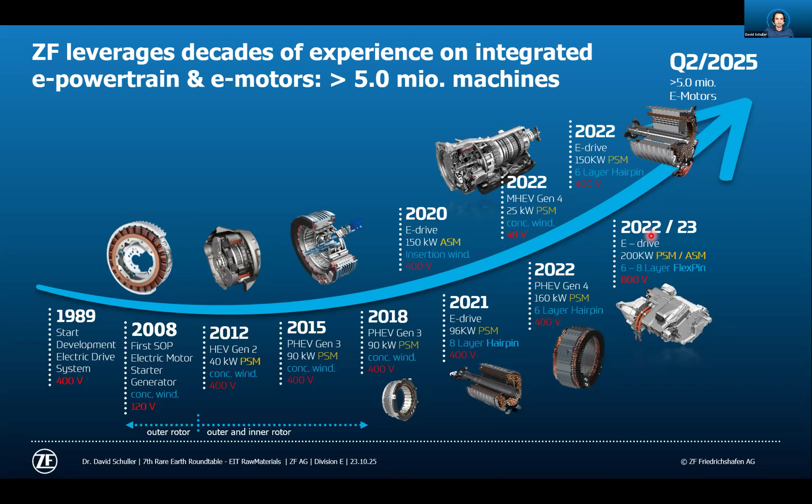Something I want to add is ZF, Zahnradfabrik, was in the past a company really famous for gearboxes, for mechanical components, and that changed the last decades. So we are currently more like a technology company that offers software, power electronics, sensors, autonomous driving, shuttles, braking systems, steering systems. So it's really a system supplier.

Focusing only on eDrives, you can here see some examples. So we have, like already mentioned, ASM machines, PSM, also SESM, where we use copper windings instead of magnets inside of the rotor.

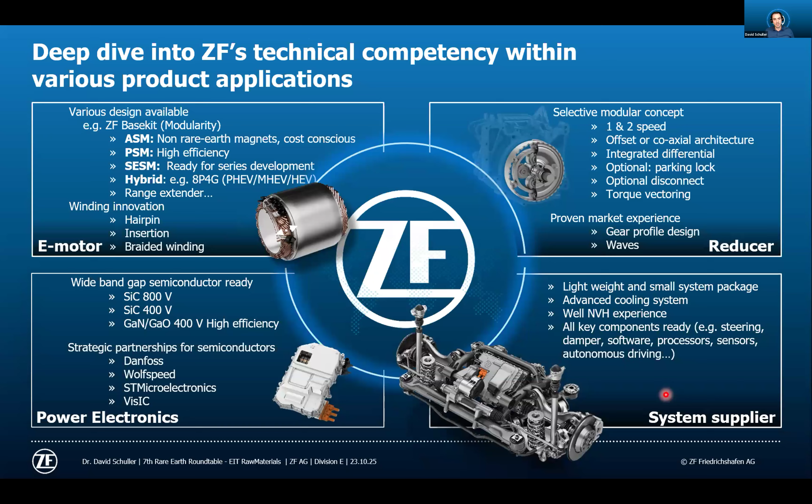We have a variety of different hybrid systems, range extenders, and own patents and developments in the field of hairpin innovations to produce more compact designs, developing our own power electronics with collaboration partners, using our old expertise in the field of mechanical components. We are currently one of a handful of system suppliers that can offer you a full spectrum of eDrive software, power electronics, suspension, steering system, braking system. So you need only the battery and then you can drive.

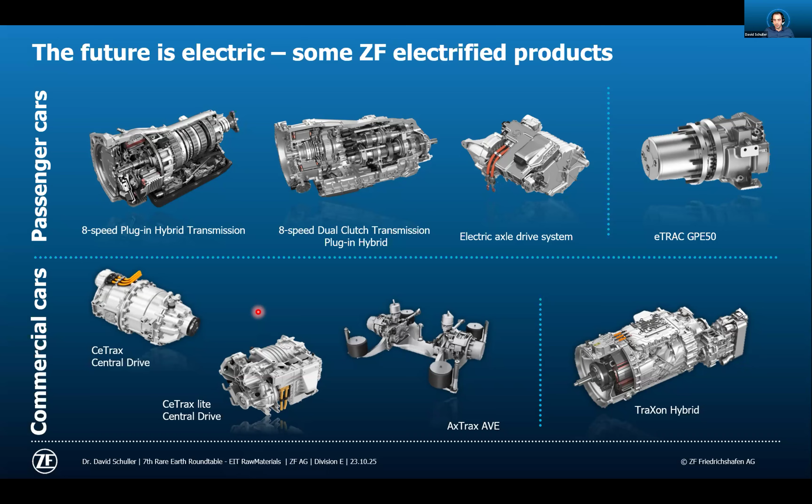All the examples were more related to passenger cars, so here you see some pictures, some illustrations of typical products. But we have also a lot of activities in the field of commercial vehicles. Because of an acquisition in 2020, ZF is currently the largest supplier of commercial vehicle applications. So we have eDrives for bus applications, trucks, and so on. We are currently in a situation where we can electrify more or less everything.

If we see the development targets of the last years, there was really a new challenge to be faster, because we have more competition in the field of eDrives, the development times have to be reduced, also because of the Chinese speed. One topic was really to be more cost effective, to show higher agility, to be faster in the development.

Here, for example, we offer, since a few years now, a base kit application. It's a modular system, an eDrive toolbox, where we often have the same components and only change, for example, the active length. With such a base kit, we are really fast in the market, faster also in our development times, because it's already ready and can only be tailored.

The second point, like always, we have to be more efficient also in our eDrive designs. We have to be innovative with new technologies like better cooling or high voltage applications. That was one really strong pillar, and was something that was really fantastic also for me, because it's more like a passion, that sustainability was important.

So the last two years, I would say, there were new questions related to the point: where do you buy your rare earths, on which mining operation, what is the separation process? And so we had really the challenge to go more inside of the production of the magnets, not only buy magnets, but try to understand the full supply chain behind our magnet suppliers.

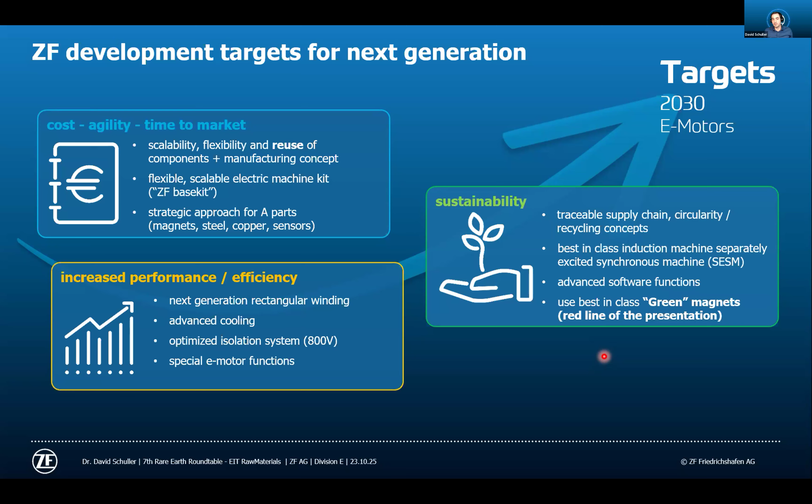If we speak about CO2 footprint, one easy way is to take your eDrive and list the materials, the raw materials, and collect a rough idea of how large the CO2 footprint of a magnet is compared with other material classes. That is shown here. So copper, for example, in a standard eDrive will have an impact of about 7%. Then you have e-steel produced by blast furnaces, the most common way, which also has a lot of waste because of the punching process, and has a really high impact on the CO2 footprint.

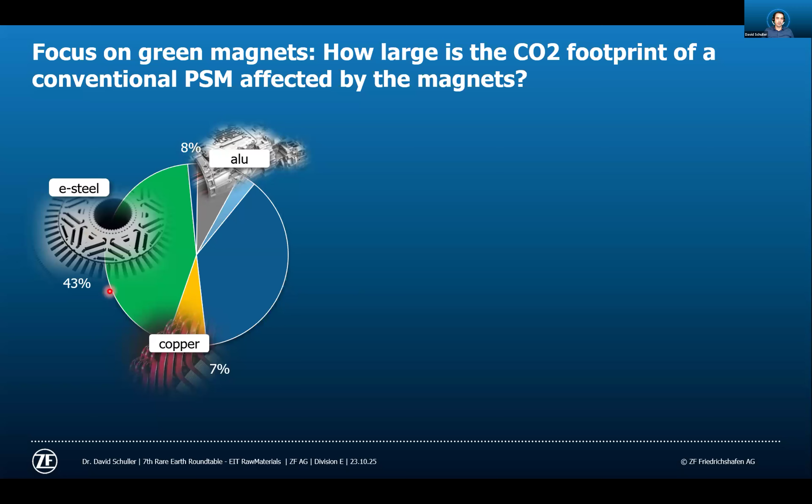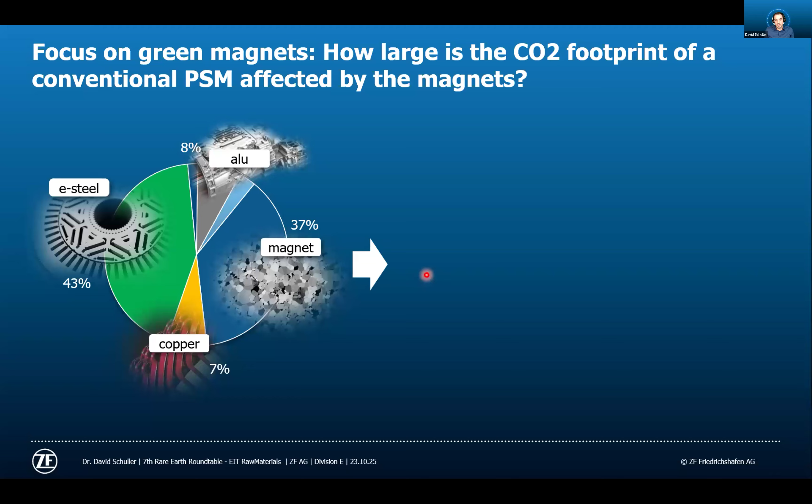Then aluminum, and the last one, magnets, roughly 37% contribution to the CO2 footprint of an e-machine. So one question: how can we reduce such a high value? How can we buy more sustainable magnets?

I want to give you insights into 3 different routes. The first is to get an insight into the strategic supply base - where can we buy green magnets? Second is how do we select magnets, so how can we be sure we're really choosing the best solution for a certain application? And the last, what can we do from a more innovative or technological side to reduce the requirement on the magnets, and with this also the composition, opening the door for more sustainable magnets.

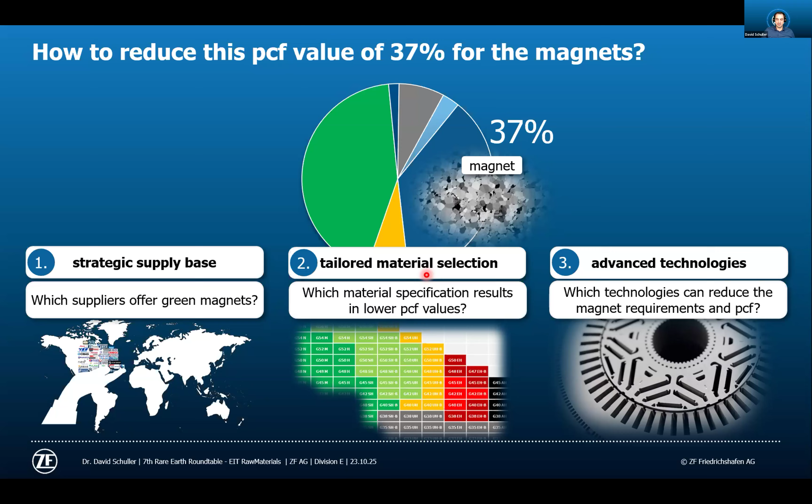Starting with the first one: if you're requesting magnets globally, you'll find roughly 100 different magnet suppliers. More or less all of them will explain that they have invented the GBD process, that they have very sustainable processes. So it's really hard at first to get a rough idea of all this variety in the market. It's really a market with a lot of competition and a lot of players, all with different USPs.

In the past, it was not the important thing to ask if we buy the best magnet, is it also a green magnet? No, because normally we buy a magnet because of performance or price. Sustainability was always, from the prioritization point of view, a secondary topic.

If we look at our situation as ZF, we have production locations in all 3 larger regions. The normal way was we have to buy cheap magnets with high performance, and so most magnets come from Asia, especially China, because in China we have a situation where they are number 1 in resources, number 1 in mining capacity, separation, and magnet supply production. They have a large variety of suppliers available.

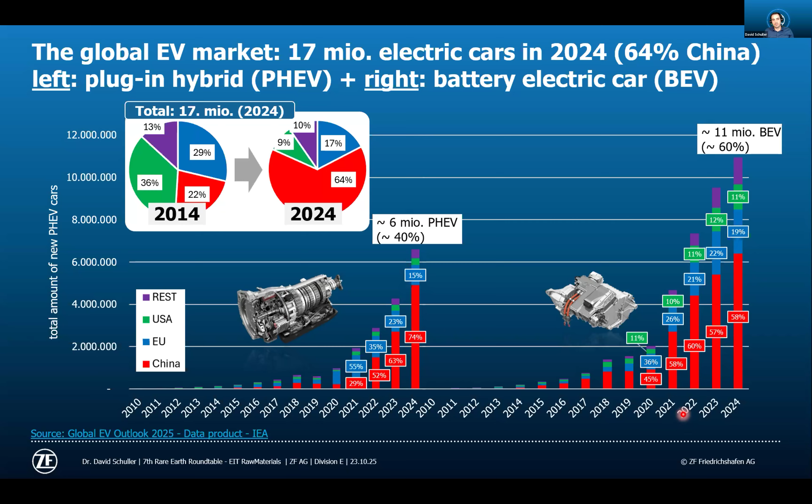Yeah, there's the party currently, and our OEMs in Europe are not joining, and that is also some problem, that we are currently not in the market with the high innovations, with the lowest prices, and with the possibility to really get here our own values in it, for example, in case of sustainability.

That is also escalated by the situation that since a few years, we see this geopolitical fight between US and China, starting with 100% tariffs, and then now the situation today is that 12 rare earth elements are now under export control. You get them, but you are not 100% sure if this will be also in future the case, and no one knows what will be with the next attack from the left or from the right.

Yeah, and we, ZF, as a German company, it would be possible to say we sit here a little bit in between. Yeah, and see the topics: free trade. We want to recycle. We want to align on the Critical Raw Materials Act. We want to reduce CO2 emissions, and we want to also support the Green Deal. But currently, it goes all, yeah, from the ranking, it's the secondary topic. The current most important thing is to compete in the market and to get magnets in general.

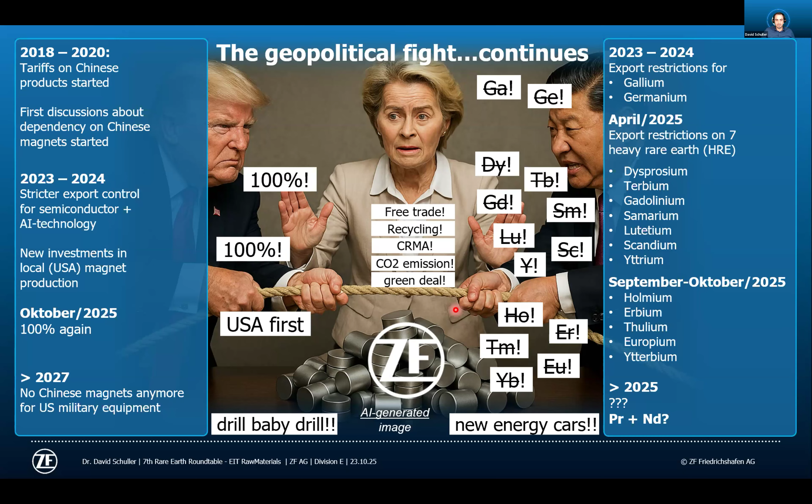Yeah, and so if we would illustrate a picture like this, what is currently for tier one the best strategy? So one way could be to say we avoid any heavy rare earths that are listed in the export restriction, for example, to go to HRE free if possible. It's not for each design possible, but it is possible.

Or should we go more in the direction to allow heavy rare earths because they have a really good technical impact? Yeah, make a motor concept more robust, but buy them only outside of China in overseas mining facilities, for example. Is it currently in that situation the best way to make something like a directed buy to really build up a storage, also a strategic storage in Europe maybe, or if we bundle all the tier one and the OEM demands, for example?

Should we go to other magnet technologies that are not that dominated from China, like hot deformed or ferrites and so on?

Or should we really go the way to say, okay, then if this is that complicated with magnets, then we avoid magnets on our e-drives, and then we have some drawbacks on the efficiency. That's a problem for the battery, but not for us as ZF. And so we offer only traction drives with ASM, SESM, and other designs without magnets.

Or the last one, really try to build up something like a closed loop scenario where we know the resources that come to Europe stay in Europe and that they are used the next 1,000 years in the best case.

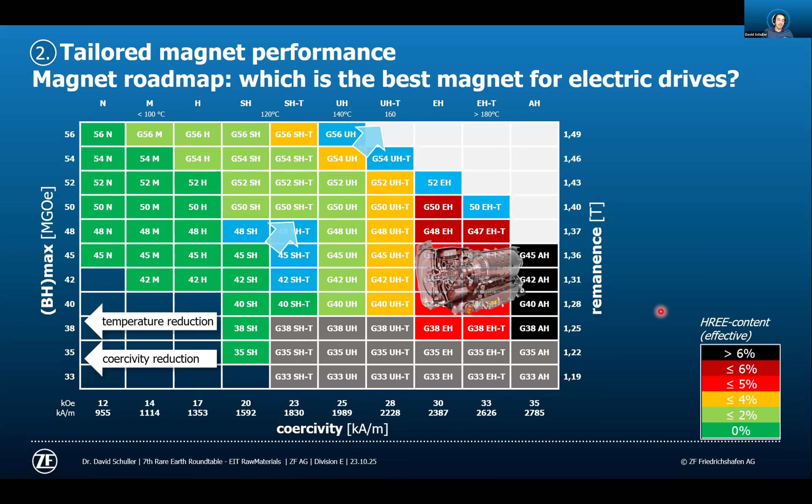In the beginning, for about 10 years, the first transmission systems used magnets with really high heavy rare earth content, in the range of 5 to 6%. With our generations a few years ago, pure e-axles, we reduced this value to about 2%.

Currently we're in a situation where we can go to HRE-free magnets, or accept a little bit of heavy rare earths to get more safety or make the design easier in terms of cooling. But that's the current situation.

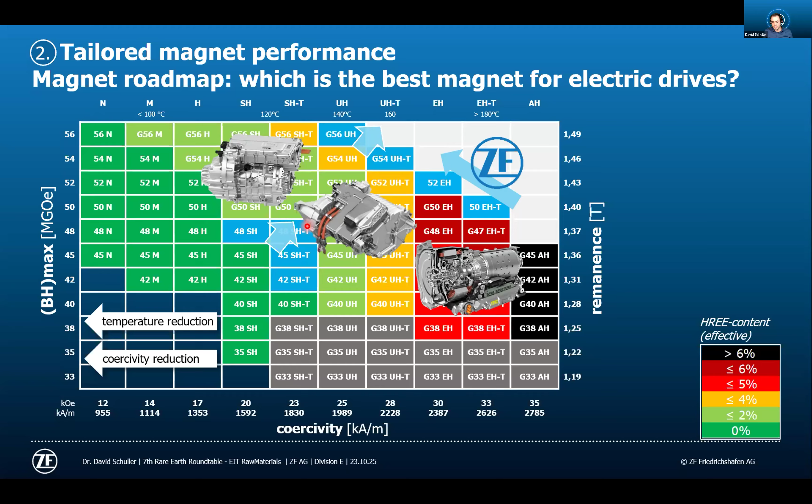Over the years, because of innovations and reduced technical requirements, we can reduce the amount of heavy rare earths we need overall, and the magnet weight is also reduced. That's illustrated in this picture.

If you open a hybrid system that started SOP 5-6 years ago, you'll find about 1.1 kilogram magnet weight, about 300 grams neodymium, and 50 grams heavy rare earths. For a standard e-drive, it's 800 grams and 60 grams.

And if you open a sports car with a more performant e-drive, you can find 4.4 kilograms of magnets and more than a kilogram of rare earths.

Calculated with a yearly demand of about 100 million electric traction drives, always using our ZF motor in the best case, you see easily we would need thousands of tons of neodymium and heavy rare earths.

It's not acceptable under the premise that currently we get a lot of rare earths from illegal mining, and we have limited resources. So it's our responsibility as a tier one, as industry, and as an OEM, to reduce this amount year by year, and in the best case avoid heavy rare earths entirely.

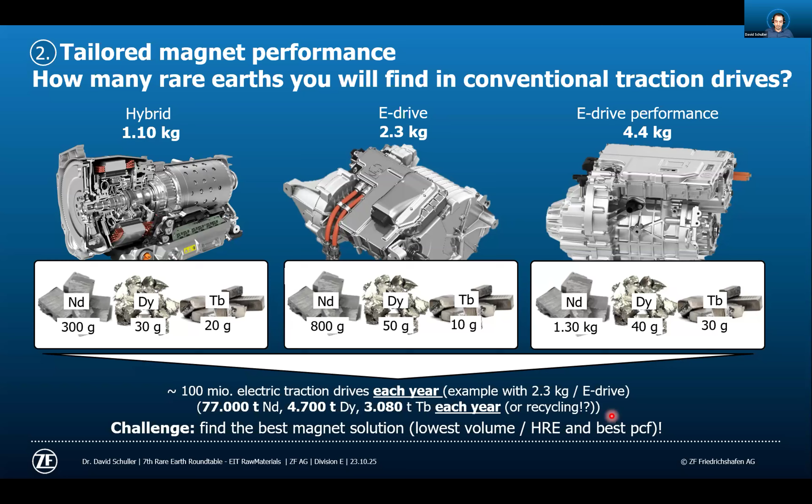In the next step, also substitute the light rare earths if possible, or go to other magnet alternatives. To link this to sustainability: all these elements have a specific CO2 footprint. If you have a higher amount of terbium and dysprosium, which are limited and require more complex separation processes, you also have a higher CO2 footprint.

So it's a good way to reduce heavy rare earths to get a good starting point, and then decrease the CO2 footprint step by step with additional topics like better separation processes, more electricity from renewables in production, and similar things. That's the link between magnet selection and CO2 footprint.

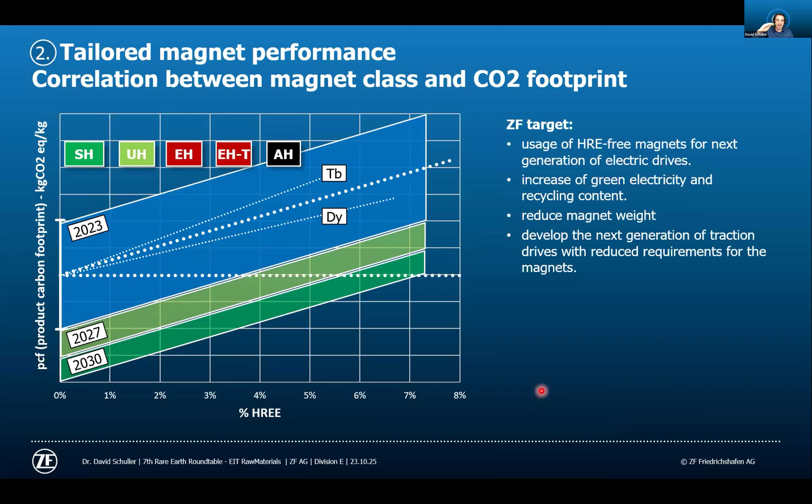In the case of a hybrid system, we were more in the range of 3 to 5-6%, and that gives a really high additional add-on to the CO2 footprint.

Another technology that's been common for decades is the so-called GBD process. The heavy rare earths are not homogeneous in the volume of the magnet; they're diffused from the outer geometry, from the surface, so you get something like a gradient.

This gradient works well because of the counter field from the traction drive—we only need heavy rare earths in positions with high counter fields, where the magnets have to withstand them. So one solution is to only use the diffusion process in that small area with the high counter fields.

This is called localized GBD—not covering the full magnet surface with heavy rare earths, but only the small areas where we know we need the higher requirements. This gives us the possibility to reduce our heavy rare earth composition and also improve the CO2 footprint.

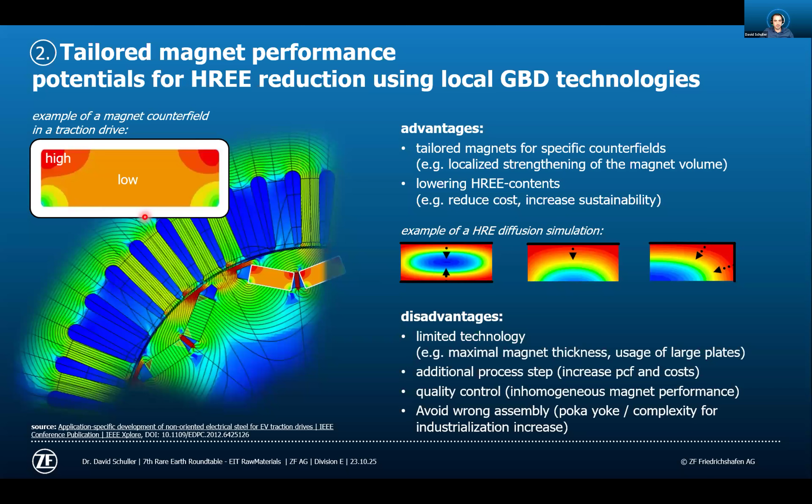Then I come to the last point: advanced technologies. Here I want to give some basic examples, the same examples as in the slide before.

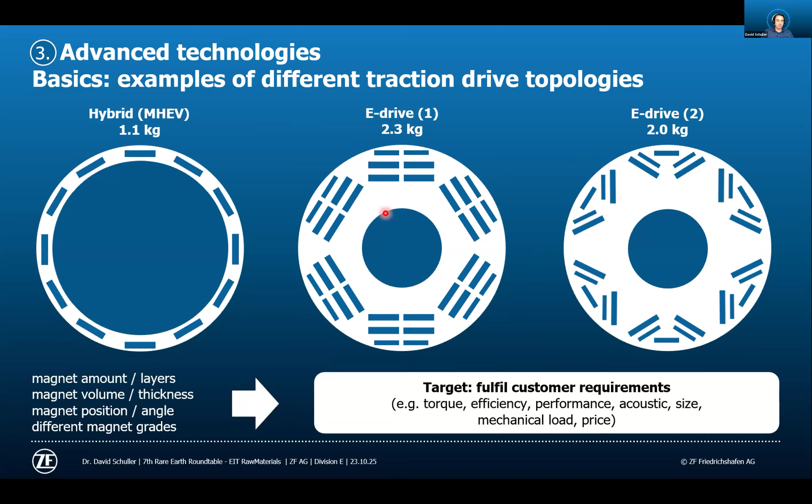In a hybrid, it's often the case that you have a lot of mechanical components, and the rotor with the magnets is more like a filigree, ring-toroidal structure. So you don't have enough space to do fancy things with the magnets, and cooling is also sometimes challenging because you use oil from the transmission.

In case of e-drives, it's really fantastic because of the amount of layers, the angle, the size, the magnet weight, you can tailor a lot. You can, for example, only use in the first positions with the highest counter fields in the e-drive heavy rare earths, but in the next layer you reduce it and reach HRE-free magnets already. So you have sometimes in one rotor concept 3 or 4 different magnet grades that you can combine.

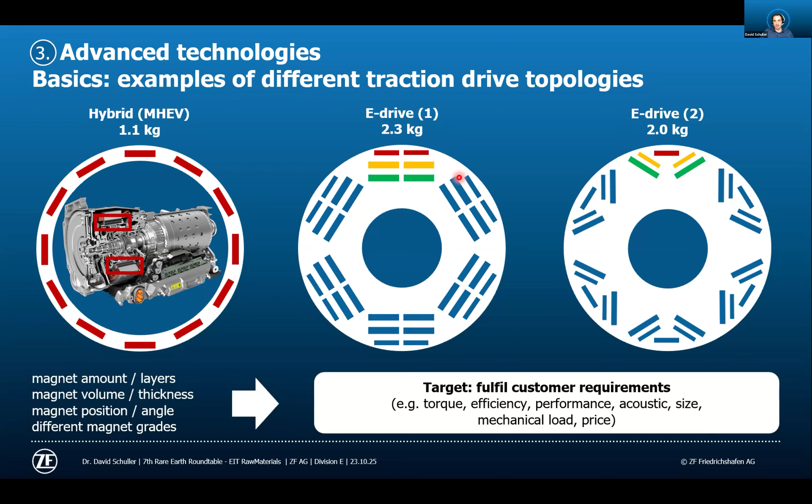Something that really changed significantly the last years is the cooling concepts. In the past it was normal to cool in the shaft from the rotor, but today the outer diameter of the stator is cooled. You cool directly on the copper windings because they produce heat. You can also cool on the magnets because they produce heat due to eddy currents that occur. So you have many additional levers now to reduce the requirements.

That's the reason why currently in our new base kit designs we can use HRE-free magnets and reach this step now, to get here really also more flexibility in case of export restrictions, if everything stays at the status that we have today.

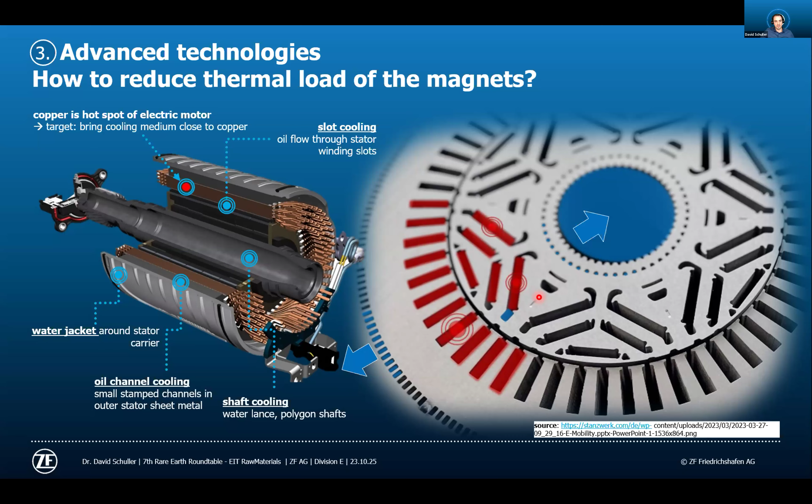Also, a magnet is not only a block. I already mentioned the GBD process, but you can also use segmentation, making the magnet volume smaller. Because of this, you have a lower amount of eddy current losses, so AC losses. You can make it axial, tangential, radial, and then you have sometimes really fancy situations where a diffusion process goes in axial direction like this, or in tangential direction like this.

So it looks like a simple block, but you can do a lot with such a magnet. The last one is the situation of how the magnet contacts the rotor - for example, is the magnet epoxy coated, then you have an isolation coating and don't produce additional losses. But if you use a passivation, it's also really important - is the magnet glued on one side? Do you have connections with mechanical components? Because this also produces global eddy current losses. So you have here also the combination of more system-relevant aspects: the magnet properties, the coating, the fixation concept. It's really a fantastic thing what all of us can make with magnets.

There's a lot of potential also in the future to lower our requirements with this better understanding of system-related behavior. And that would be my summary.

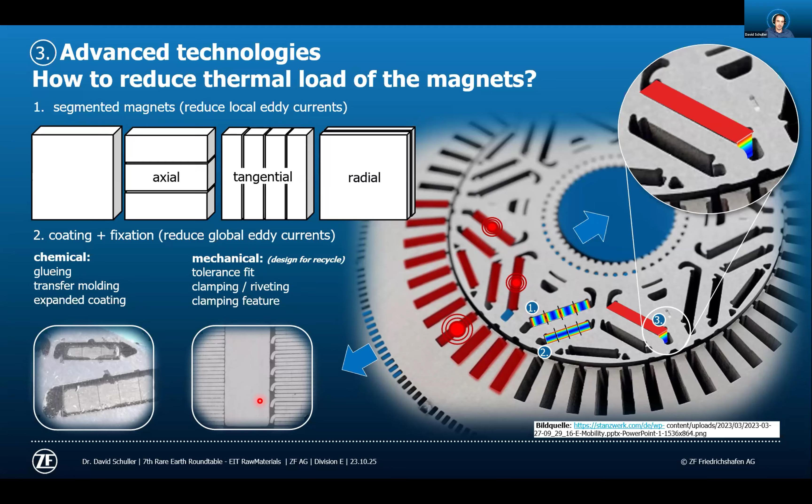So I gave you some insights into the topic of strategic supply chain, tailoring the material selection, and these examples of advanced technologies. From our point of view, we would say we really have the potential, the lever, to reduce our CO2 footprint of our e-machines in a significant way. It's only the question of having here really the...

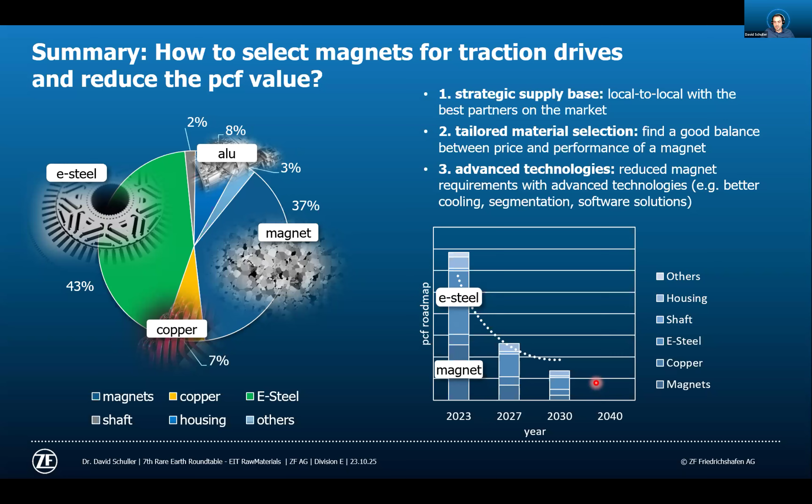...reason, the requirements to do so. And here sometimes it looks like every day the strategy from Europe, from China, and from the US are changing. It's really hard to say what will be the future, and we as a tier one can only be as flexible as possible. But I want to show this last slide.

So I tried to highlight some of these aspects, but I'm not sure now, Nabil, if I'm over time, or if it's only for discussion.

Thanks, so we can wind up now. And thanks, David - a very exciting and eye-opening presentation. You touched technology, you touched market, geopolitics.

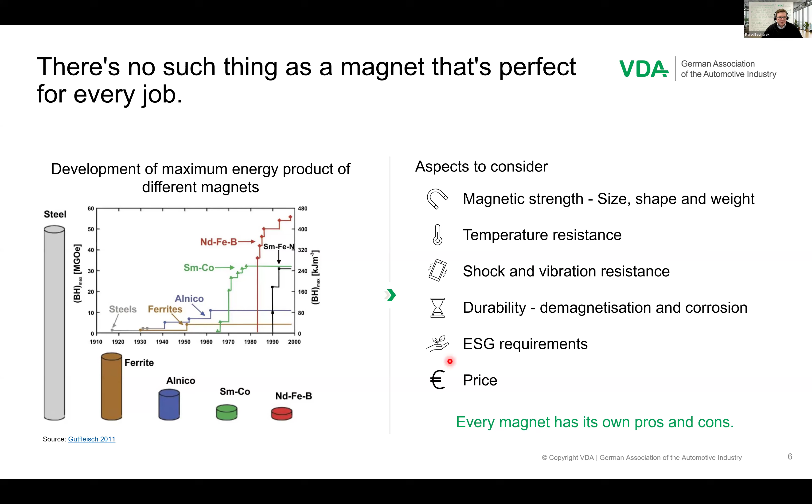I'm really happy that David had similar figures for the amount of certain permanent magnets per application. We calculate around 500 grams in a normal internal combustion engine car, and in the PHEV you have a bit more, and in the BEV per se as well. But you also have a lot of magnets in mild hybrids, hidden in the transmission or gearbox, as you can imagine.

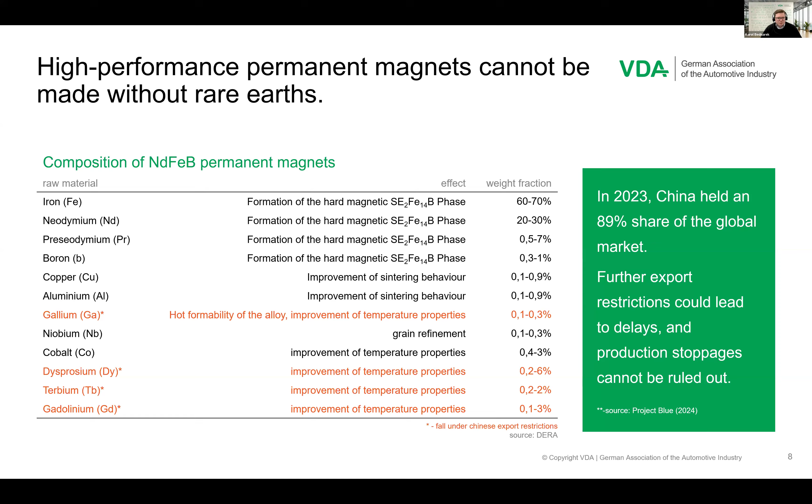Which of course leads to a lot of documentation and, we can say, problems, because to apply for an export license it really takes time just to get all the documents together, especially the documents needed for the end-use certification.

So if you are a Chinese exporter or producer of magnets and would like to export those magnets to a supplier in Germany, then of course you need this document: the originals of the supply contracts, documents for the exported products, end-use certificates.

Therefore, we think that you need approximately 1 to 2 weeks, or even 3 weeks, just to get all the documentation ready to apply for an export license. Then in the first check at your local administrative office, which hopefully just takes 10 days, they will just approve or check whether the application is complete.

And after that, it will be sent to the MOFCOM, and there it can even take up to 60 days. And these days are working days this time - 60 working days to approve your export license or not. However, we heard in some cases it even took longer than just 60 days.

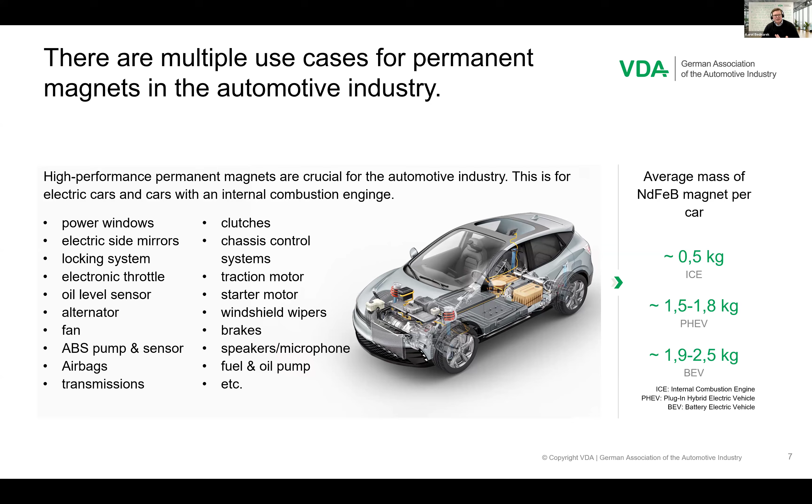Where the magnets are very small, we probably don't see a good business case for recyclers to make the effort to get those small permanent magnets out of the car, contributing to feedstock for recycling. With loudspeakers, for example, you sometimes have 70 grams of NdFeB magnets in one loudspeaker, and since it's easy to get to a loudspeaker, that might make sense. But to get the sensors out of other applications, and the airbag and power windows, this is probably not a very economic case. So we don't think this will lead to a contribution for recycling, to be honest.

But still, we are very committed to this idea of circular economy. The automotive industry already has a circular economy built with internal combustion engine cars, and there's no difference when it comes to electric vehicles. So we will be building up those value circles, if you like to call it that, and permanent magnets will be recycled from our cars, just to give us a bit more certainty to get a feedstock of new permanent magnets coming out of Europe, possibly.

And then substitution—of course there are some compositions that don't need heavy rare earth elements, as David already showed you. We already have this in place for traction motors as well. If you look at ZF and Schaeffler, they're producing traction motors that don't need those heavy rare earth elements, and they're already in cars today. But when it comes to sensors, pumps, and motors, it will be very difficult to replace them with magnets that aren't neodymium iron boron, because of space restrictions.

You maybe don't need heavy rare earth elements in them, but when it comes to braking systems, for example, you probably want your brakes to work even when it's very hot, since brakes produce a lot of heat. So we don't think they will be replaced by magnets without heavy rare earth elements. It's also not that easy to switch from a sensor with magnets to a light sensor, for example, because we have a lot of vibrations there, which could lead to wrong information being transmitted. So we don't see a big possibility to substitute there.

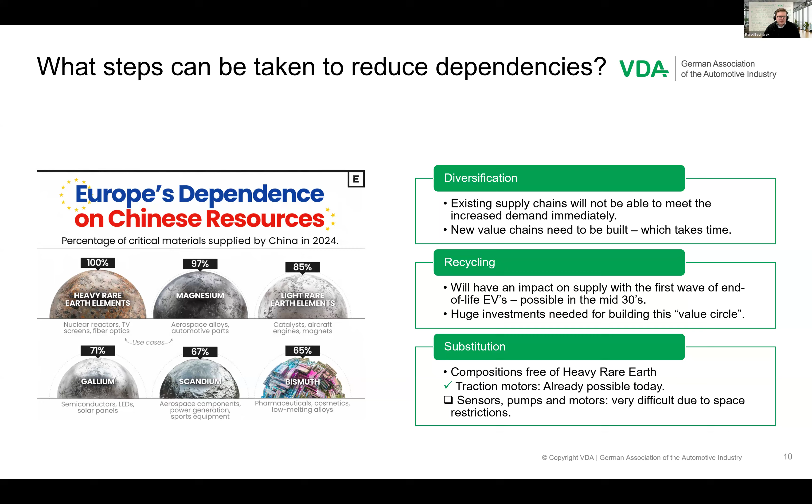I prepared a small slide comparing the different traction motors, but I think David did a really good job presenting them, so I don't want to go into much detail here. What's important to understand is that PMSMs, these permanent magnet synchronous motors, are very effective at lower revolutions but maybe not as effective at high revolutions. So we see a lot of developments combining those two engines, or even sometimes PMSMs with induction machines, just to have the advantages of both technologies in one car. In some cases where you have a dual motor system, you probably have two different traction motors using different technologies.

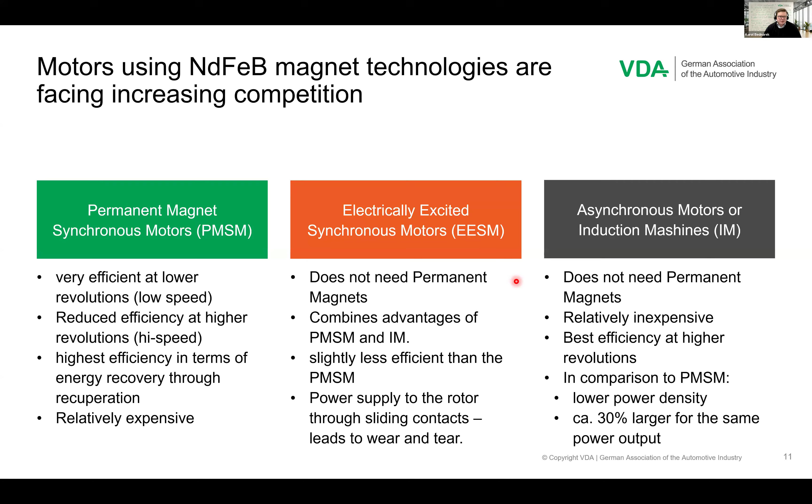What about legislative matters? We just want to point out that when it comes to permanent magnets, it's very difficult right now, because we have the Critical Raw Materials Act, which defines a lot of recycling targets, labeling issues, data carrier requirements, calculation methods, recycled content requirements—for example, what recycling feedstock is allowed.

So is it post-consumer waste or is it production waste?

And then we have the End-of-Life Vehicles Regulation, which will now be replacing the End-of-Life Vehicles Directive. It's still in the trilogue, but the documents we have on hand show this is our central legislative piece for circular economy in the automotive industry—essentially our rule book for circular economy. We do have different targets for everything.

When it comes to labeling, the CRMA states that you have to label all traction motors, whether they have a magnet or not. The ELV regulation only requires labeling if there's a magnet in it. The data carrier also looks a little different.

The calculation methods on recycling content are not defined yet, but the timelines to get there differ between the ELV regulation and the Critical Raw Materials Act. And recycling feedstock, I already mentioned.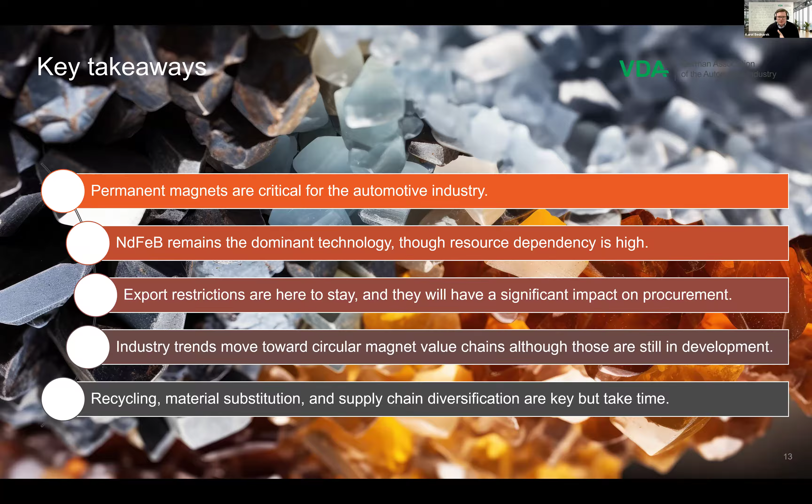The timelines are also a little different. Last but not least, our key takeaways—I don't want to go too much into detail on these. Thank you for listening, and I look forward to the discussion later.

Thanks, Karol. Very knowledgeable and an exciting presentation. Covered a lot of things.

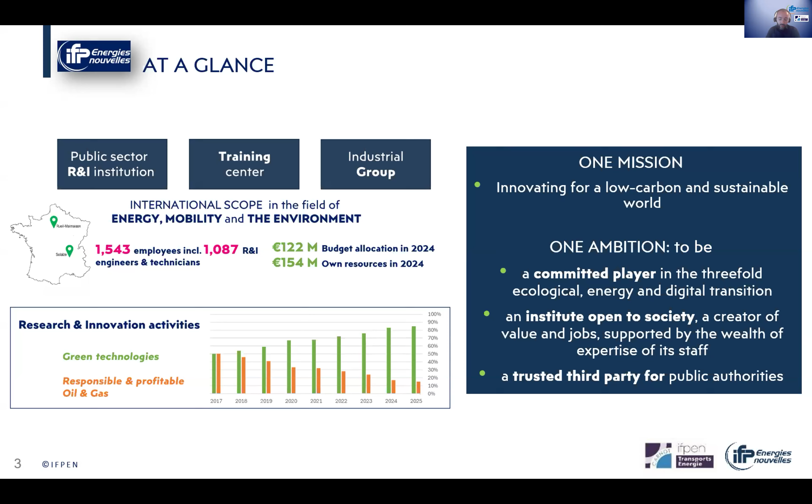At a glance, IFP Energies Nouvelles is a public research institution, a training center, and an industrial group. We are situated in France, though we have international coverage and scope in the field of energy, environment, and mobility, where I belong. Our purpose, as a public institute, is to help startups and small and medium companies bring innovation to the market through different actions, technical, financial, patents, etc., in order to boost industrial competitivity and employment around us.

So the position of IFPEN is in between research, with low TRL components or material providers, and on the other side, the market, high TRL propulsion system providers. The boundaries are not so vertical, because we are collaborating and having partnerships at those interfaces. In a few words, at IFPEN we are developing and validating electric motors, power electronics, and software, mainly up to TRL7.

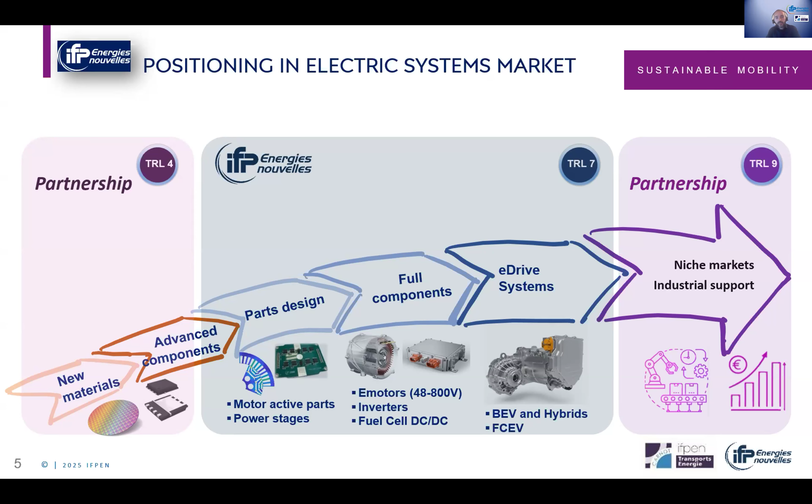Like David mentioned, with low or no competition. If we look through the chain, the closer we get to the produced magnet, the lower the competition. So we are in a situation of monopoly on this production side.

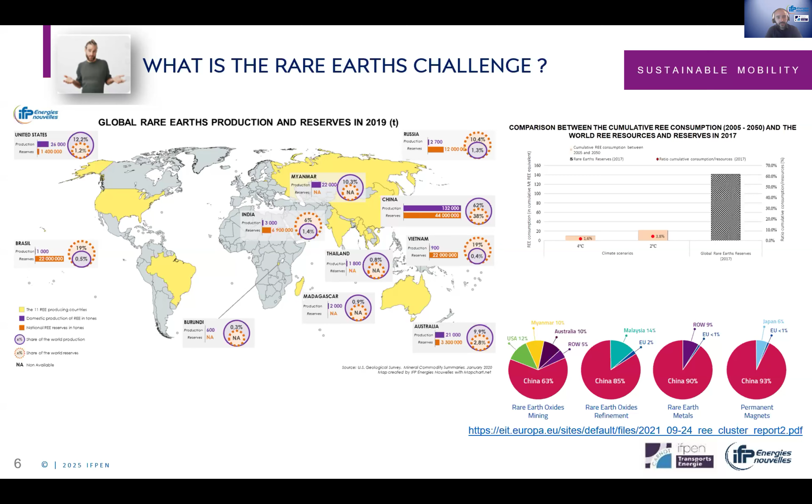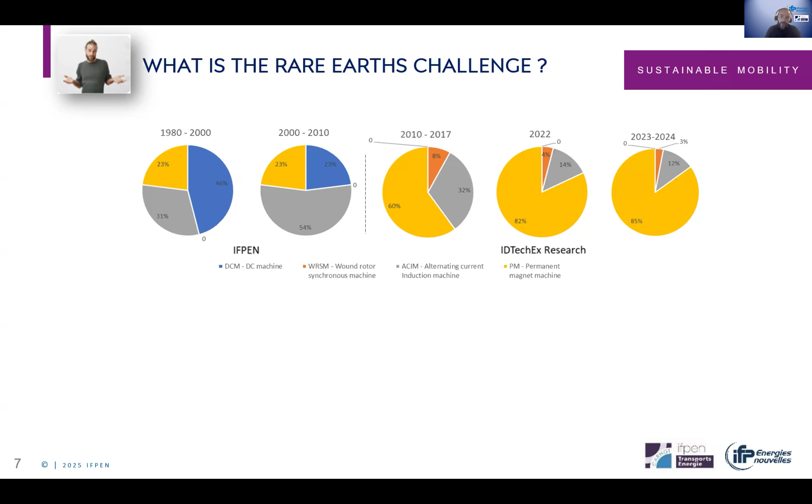David mentioned this, and as a motor designer I can fully understand the trend, because with permanent magnets, at least, we can find a way to satisfy, I'm simplifying, but we can satisfy more or less any requirement in efficiency, volume, whatsoever, really. Though, since April, with magnet exportation controls and licenses, and I thank Karol for the complementary information, the question is, what are our alternatives?

My point of view goes towards diversification, the same as Karol said. Diversification mainly of technologies, of motor technologies, together with permanent magnet circularity. I think both are very important. And the remaining question is, how much diversification are we capable of? I think this is the question today.

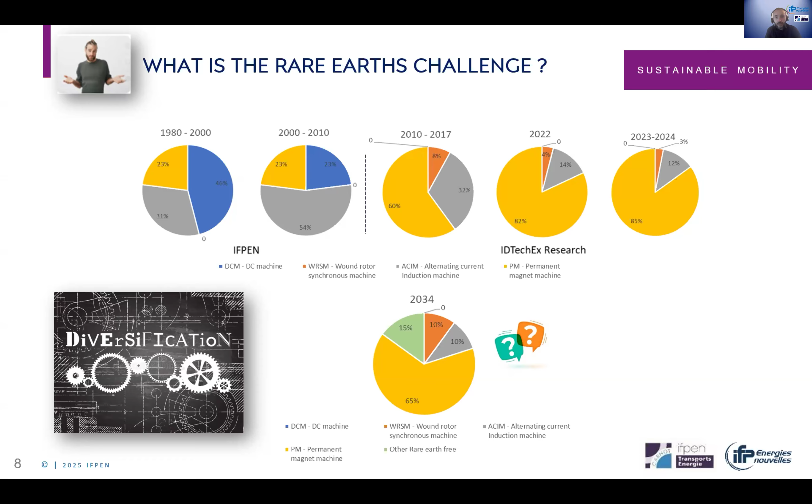About the mitigation approach, let's say I can speak better about those I implemented 7 years ago at IFPEN, and I believe in them. They are quite similar to what we heard earlier, but let's start. We have 3 pillars historically.

The first one is rare earth reduction through topology choices, as for instance permanent magnet assisted synchronous reluctance topology, which doesn't rely too much on magnet performance. Heavy use of computer-assisted optimization and reducing magnet stress in the motor, mainly on the thermal side, which has impact on heavy rare earth needs like terbium or dysprosium.

The second pillar is about competitive—and I insist competitive—alternatives based on rare earth magnet substitutions or substitutes, like for instance ferrites. Just to mention the ferrites, even if the magnet is poor, we will see at the end of the presentation how we can make it competitive today in the automotive industry. Or even we can imagine other alternatives, magnets having lower performances.

This is what I'm speaking about today, and going up to completely avoiding permanent magnets, as in the case of the pure synchronous reluctance motor. I will not be speaking about this one in this presentation. We can imagine as well wound rotor and induction motors, which are already on the market and very good alternatives for higher segments. The third pillar is all about designing the powertrain from scratch for lifespan extension and easy and automated end-of-life magnet collection.

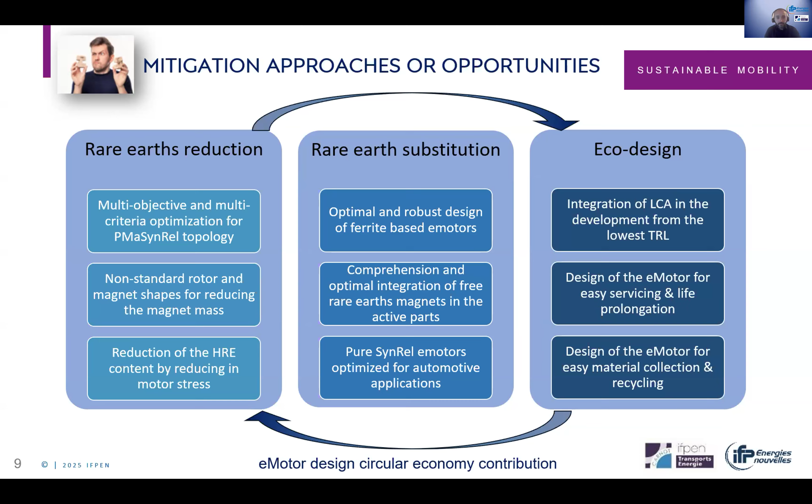From a technological point of view, how to reduce the dependence of the rotors on neodymium-based magnets. To illustrate that, I have a chart which shows permanent magnet synchronous torque on the left-hand side versus reluctant torque. Reluctant torque is the one produced only by the electrical steel flux barriers without magnets. The indicator I'm following here is the kilowatts of mechanical power produced per kilogram of magnet. Of course, on the upper left-hand side we will have all the surface-mounted permanent magnets, axial flux machines, etc., relying heavily on the permanent magnet performance.

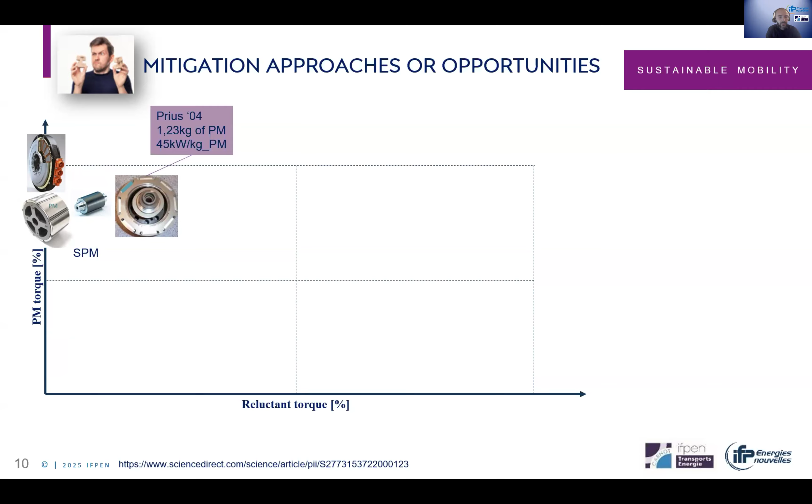Then if we look to the second rotor, which is a little bit buried in the rotor, magnets are buried in the rotor, we can see that we produce 45 kilowatts per kilogram of magnet. Going still forward, when we see that adding a bit of geometry in the rotor can almost double the performance in terms of kilowatts per kilogram of magnet, and then going to even higher investment in terms of geometry optimization with two flux barriers, we can reach 100 kilowatts per kilogram of magnet.

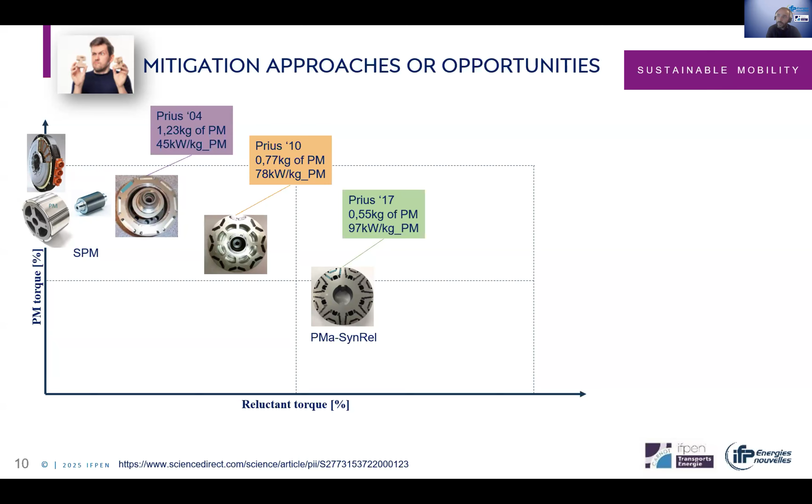Basically, we are producing two motors with the same quantity of magnets with this PMa-SynRel motor in comparison with the previous 2004 version. On the other hand, of course, we have pure Synrel, which doesn't have any magnets, as well as wound rotor or induction motor, which are great alternatives. And we have here a technology I will be speaking about, which is very close to the pure Synrel.

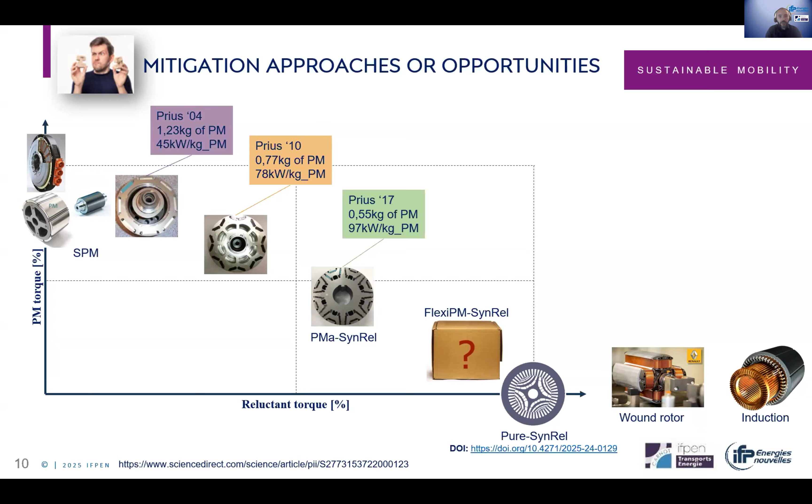It's not relying so much on the magnets. So we can see that investing in the rotor flux barrier geometries and their optimization reduces dependence of the torque on permanent magnets. There is something to be looked at here, because this approach opens the gate for reducing the neodymium magnet quantities per motor, providing leverage when it comes to using recycled rare earth material and producing more motors out of them. Secondly, it opens the gate to implement substitute magnets having lower performances—I think this is another interesting point.

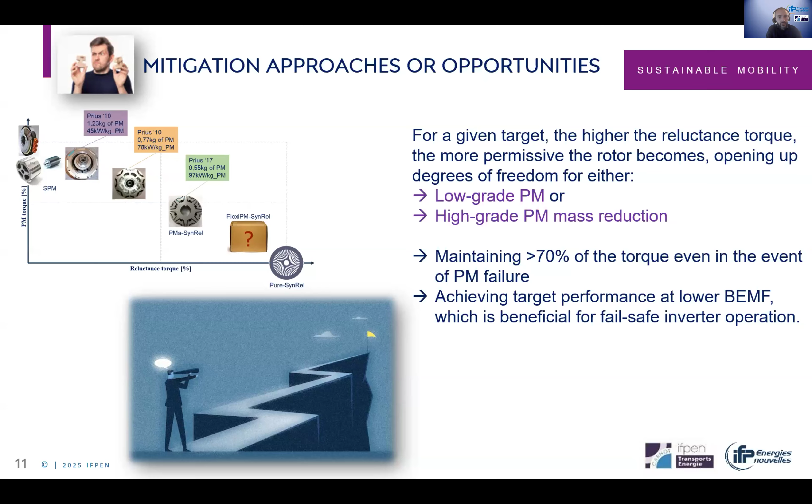So a practical case. I'm showing you a rotor, and it's not a promotion for IFPEN solution. It's just one of the possible solutions to answer the question. I hope, and I know, other tier ones, probably ZF and others, work on these problems, and I'm very happy to speak about this and make general knowledge about this approach, not only the IFPEN solution as such.

Going back to the presentation, in 2020 we tested this approach by pushing the rotor reluctance to the maximum and extending it towards end-of-life collection enabling. To do so, we gathered feedback about current technological obstacles from the end-of-life collecting and recycling sector, so we could set the development requirements from the beginning, considering those problems.

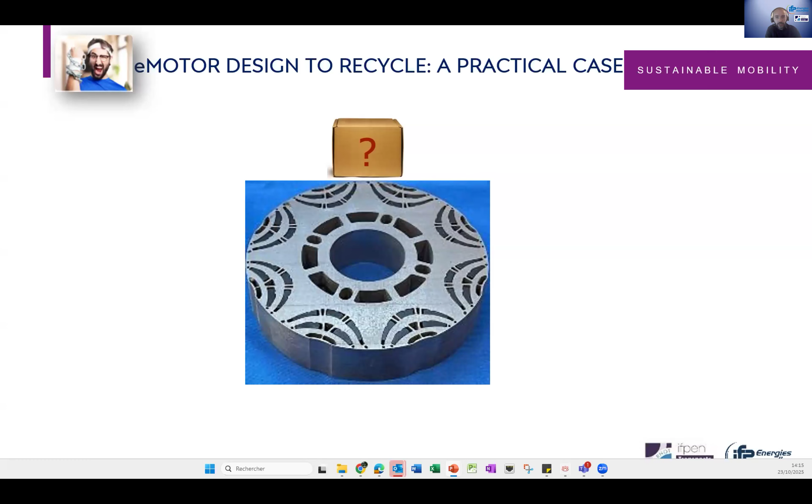Later, we saw a motor closing the gap with 110 kilowatts per kilogram, but this was in 2023, I believe.

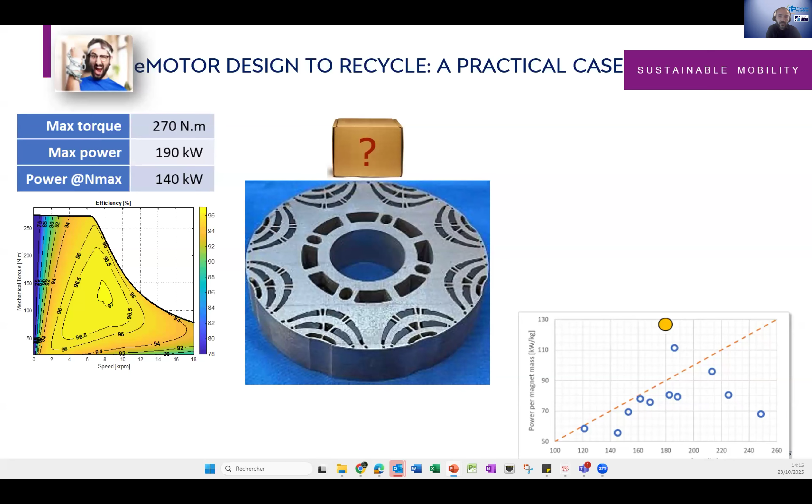This performance was achieved through multiphysical optimization of the rotor flux barrier on one hand, and small geometry implementation on the electrical steel and magnets, I will show you here. So we could reduce, or I think even avoid, gluing those magnets. As you can see, they are not glued, there is no resin around, which allowed us, after testing the motor, to extract the magnets without even demagnetizing them in ovens. I think this is an interesting aspect.

Is it industrial? Not at this stage. Is this something to work on? I think, yes, it is. So this is our starting point, which I wanted to show you.

And so now the next step about technology maturation, along with high performance magnet pilot line development in the Magellan project, is the next slide, if you want to go on.

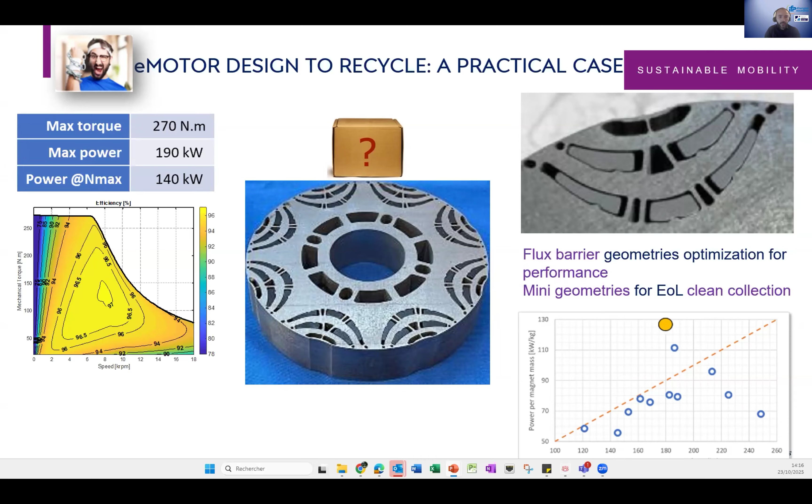Okay, great. So if you're here, I think you already know something about Magellan, so I'll be short. The Magellan project is about developing the process and know-how for high performance magnet production, incorporating about 25% recycled rare earth material, and also developing a surrounding ecosystem, which is absolutely necessary if you want a European ecosystem to run.

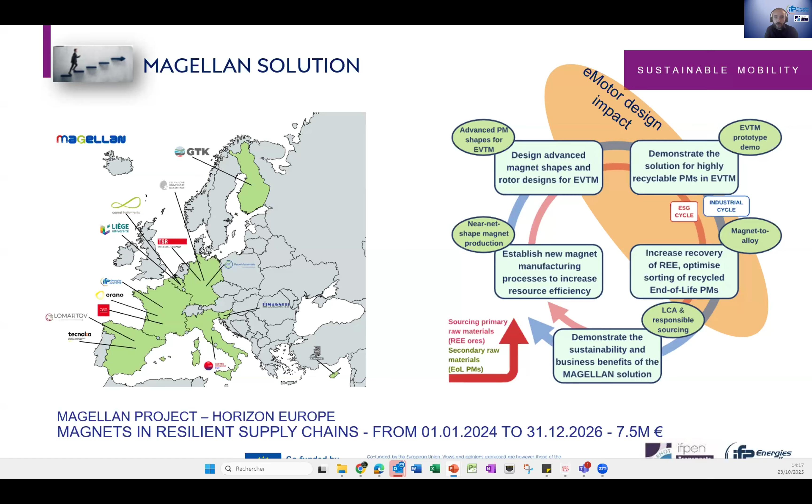When we look at the flow chart on the right-hand side, I don't know if you see my mouse, we can see that even though motor design is not of first interest when speaking about magnet process production, motor design is an enabler and has impact on almost 50% of the activity contributing to reach the project goals. That is why powertrain design should update their development functional requirements so it can positively, and with limited cost, contribute to magnet circularity in Europe.

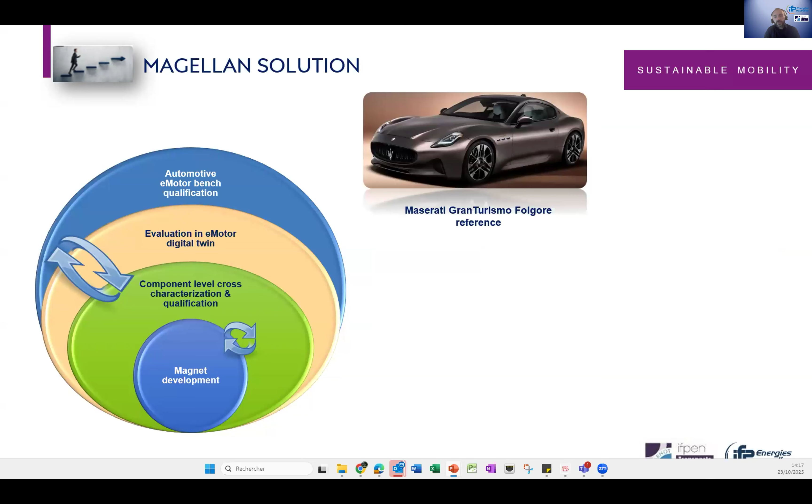So in the Magellan project, our reference for the process, our reference for developing and qualifying the magnets, is the high-end motor from a premium vehicle, the Maserati Folgore. So we are targeting the magnet and motor performances of this vehicle. In this way, we avoid any under- or over-quality development on the magnets very early in the project, limiting investment, which is natively very heavy to develop a complete process.

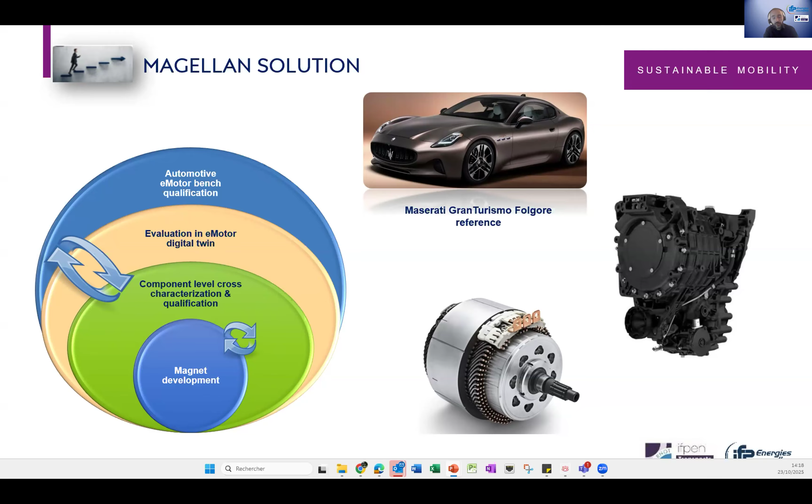So Magellan magnet batches are evaluated in a digital twin in a short closed loop, and then experimentally at the component level, hysteresigraph for instance, and finally on a full power electric motor in a testing bench, IFPEN of course.

About the digital twin, I won't extend on this one, but it's an in-house digital electromagnetic multiphysical digital twin, based on a mathematical layer dealing with optimizations, and a multiphysical simulation on the second layer. In order to set up this simulator, we use bibliography and data about the reference motor.

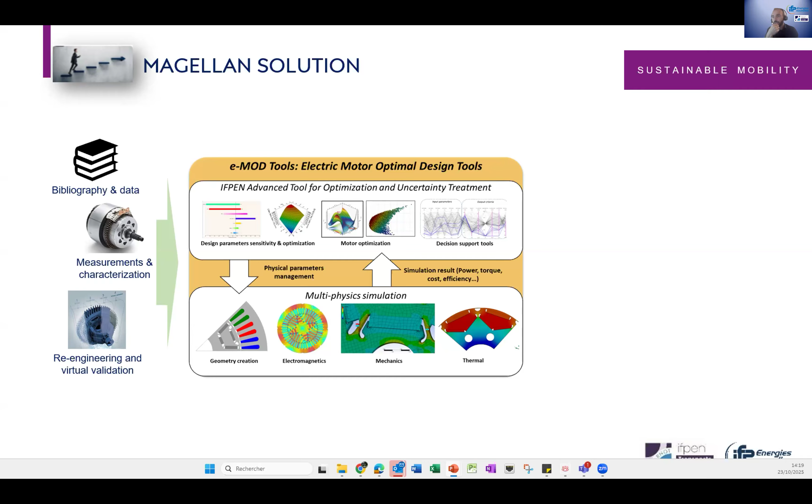We use measurements and characterizations, and we targeted a two user-oriented approach for our magnets. The first one is very natural, the early adopter point of view, which is a direct shift: the same geometry, but we change the material, going from Chinese magnets to European magnets while keeping the performance and geometry.

The second approach is optimizing the rotor on purpose in order to reduce the quantity of magnet for the same performance, and in such a way produce a leverage for use of recycled material. At this stage, what was done in the simulation is that the rotor wasn't optimized.

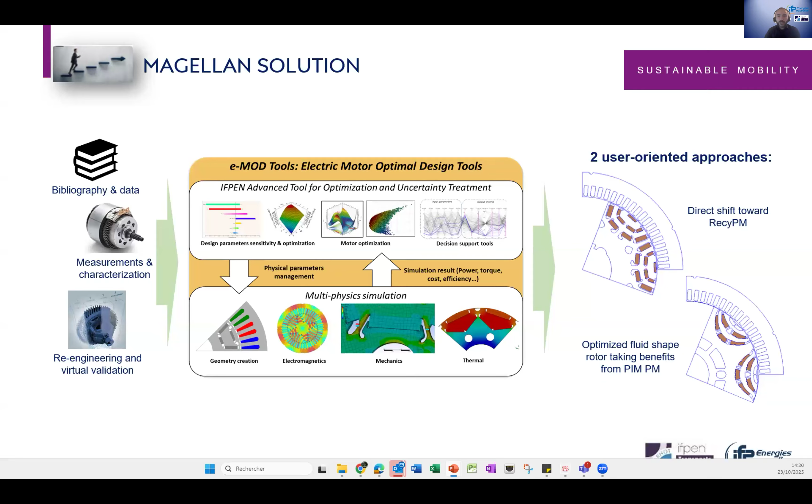We just took the rotor geometry you have seen initially, and then we rescaled it, keeping in mind that the mechanical aspects were validated, but no electromagnetic optimization. It was done to put under control the target of at least 20% reduction in permanent magnet mass for the same performance. So on this slide, you can see the magnets' performance.

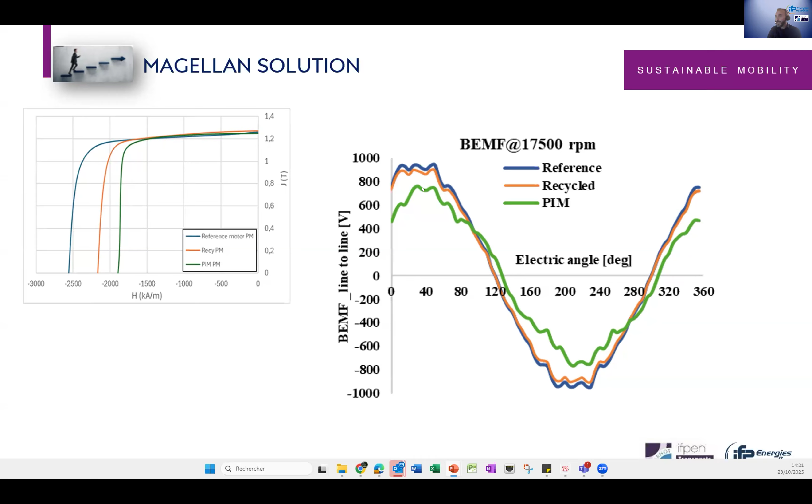But we can expect that our non-optimized PIM rotor is underperforming. So what we can see here on the torque versus speed curve is that our PIM rotor, with non-optimized geometry, produces more torque than the reference motor, with 20% less magnets and lower performance magnet. It's quite an interesting result to start with.

The second aspect is in the power band here. You see that we are quite close to the reference in terms of power, but we are lacking a couple of kilowatts. This will be a job of optimization of the rotor geometry and the reluctance torque in order to close the gap with the reference.

Of course, when you do the direct retrofit with the recycled magnet, what we can see is that we are very close today. I think with the second, third, and fourth batch of recycled magnet from the Magellan project, we'll really close the gap, and the target of being able to produce a high performance permanent magnet in Europe with recycled content will be possible.

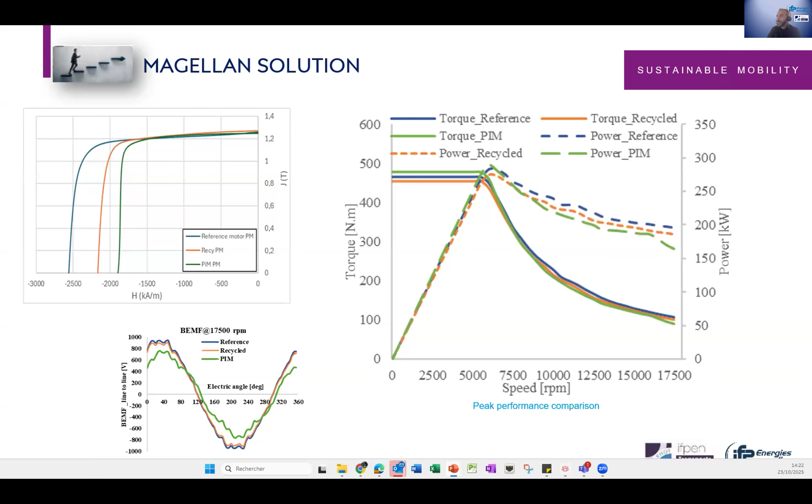So finally, some key takeaways from my side about the initial question. The first one is that high performance European permanent magnet production with recycled content is necessary. It's necessary for the health of our industry, not only automotive industry, like we saw in Carol's presentation.

I think motor designers and actors have a very important role to play, not only in the short term, but in the long term, because they are enablers of circularity for the permanent magnets, really. And they have to work with European permanent magnet production companies, which are setting up now. Finally, this approach we are putting in Europe about production of permanent magnets has to stay environmentally healthy in order to avoid solving one problem and, by solving this one problem, falling into another.

Thank you very much.

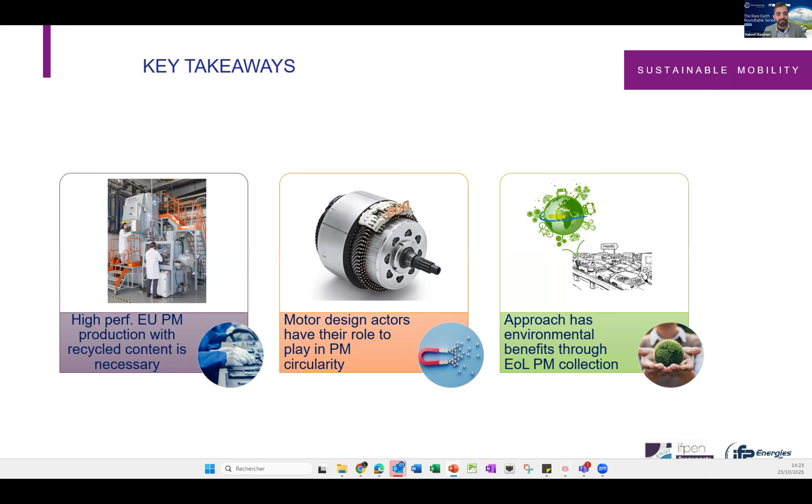Maybe I'll start with Misha. You explained well on the motor structures. Initially, you also said compared with other motors, like wound rotor and induction motors, and you mentioned OEMs like Renault and BMW using a different kind. But all three presentations said PMSM, permanent magnet motor, is the most efficient. Now how do the alternative motors fit there, and how, for example, do other OEMs match that same efficiency? Is it through battery, or is there another mechanism that could match the performance of the permanent magnet?

I think the answer depends on the segment. The high-end C and D segments of vehicles require very high efficiency and very high power all together in a limited space. So for those bigger vehicle segments, I think wound rotor is a good alternative in terms of efficiency and power capability, though the challenge is very difficult. On the other side, for B and C segments, other alternatives like ferrite motors, which when designed properly—because ferrites are quite capricious—can match the efficiency of permanent magnets. But they cannot be as versatile as permanent magnets today. So I think it really depends on the application we are targeting.